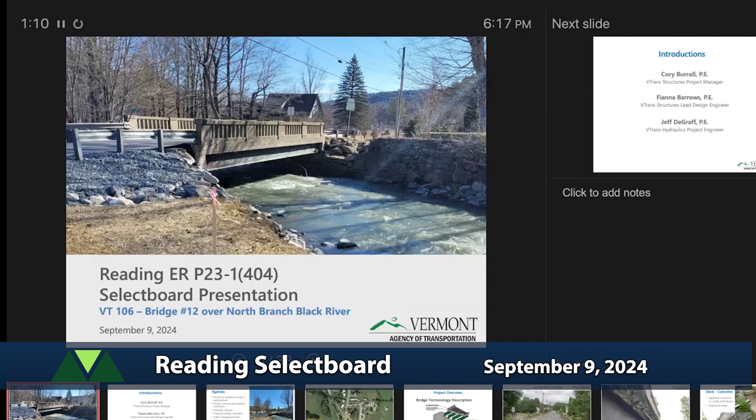Anyways, we will get started. This is the Reading ER P23-1(404) project for Bridge 12 on Route 106. I'm Cory Burrall, the VTrans project manager for the project. I brought with me Fianna Barrows, she's the structures lead design engineer on it, and then I've brought Jeff DeGraff, he is the hydraulics project engineer.

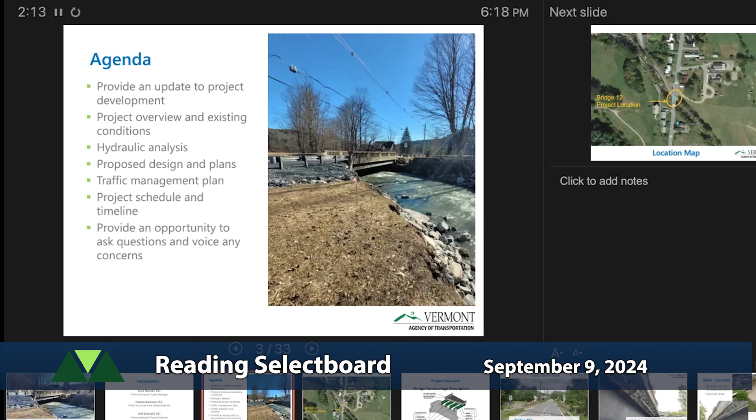So our agenda for the day is we're gonna provide an update to the project development and where we're at. We're gonna discuss the existing conditions and an overview of the design criteria. We're gonna talk about a hydraulic analysis and what we've done to analyze the current structure and how the hydraulics are handled, as well as a future state, and try to mimic the 2023 flood event. We're gonna talk about our proposed design, criteria, and plans. Then we'll talk about a traffic management plan and how we plan to handle traffic during construction of the bridge. And then we'll outline where we're at in the project schedule and timeline, and then provide an opportunity to ask any questions.

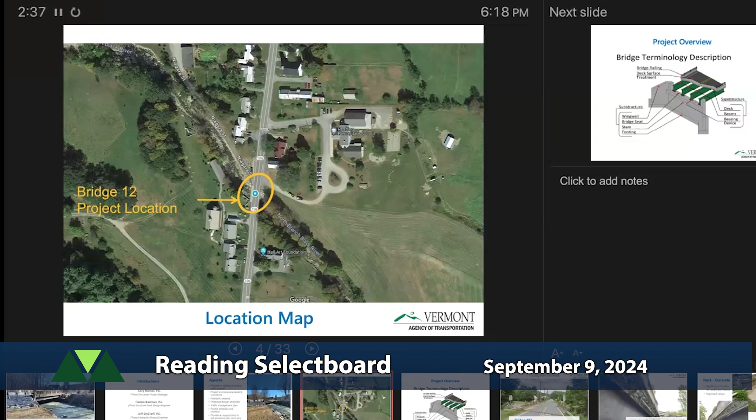So here's a map of Bridge 12 on 106. North of the bridge is the Reading Elementary School. South of the bridge is the Hall Art Foundation. As you can see, the river was a waterfall upstream of the structure, and then fields directly downstream of the structure.

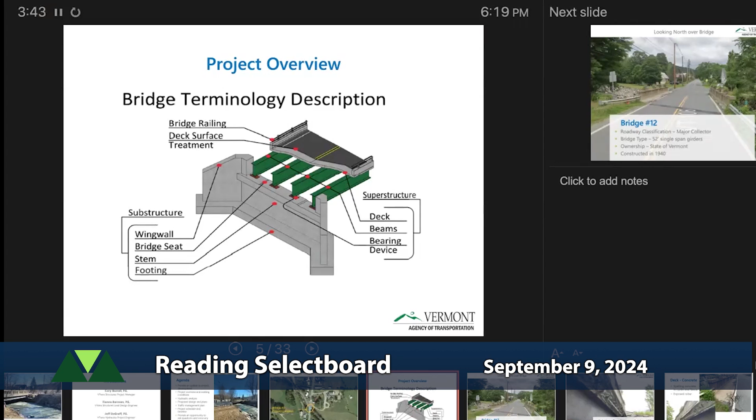And then that's supported by a substructure, which is typically a concrete foundation, either supported by a spread footing or sometimes a deep foundation with piles driven to bedrock. And then you'll see a couple other terms: wing walls connect to the foundation and help support the fill and the roadway. And then stem footing is just components of an abutment or the substructure.

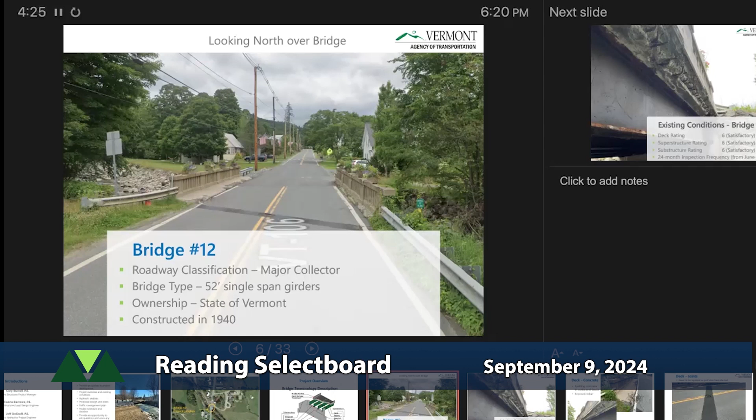It is classified as a major collector, owned by the state of Vermont. It's a 52-foot single span on rolled beams, constructed in 1940, but it's believed the laid up stone wall that the abutment sits on was older than that, so we're not exactly sure of the age.

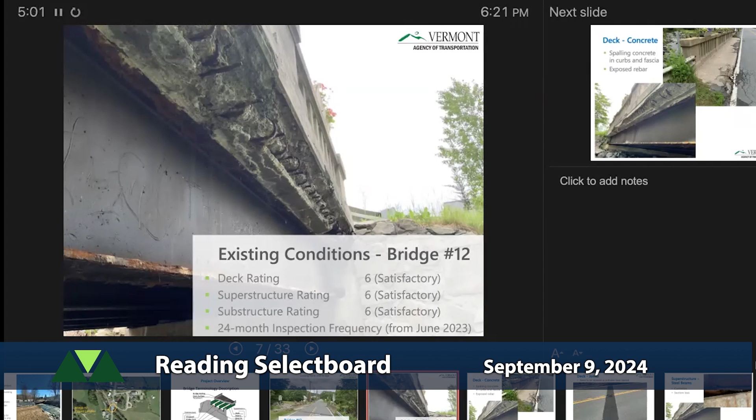Existing conditions: this bridge is on a 2-year inspection frequency. It was last fully inspected in June of 2023, right before the flooding event of July. The deck, superstructure, and substructure all rate out as a 6, which is satisfactory. We understand that post-flood event, some of these ratings may have decreased, but not to a level that would require a full inspection or a decrease in inspection frequency. So they're okay waiting until 2025 for their next full inspection.

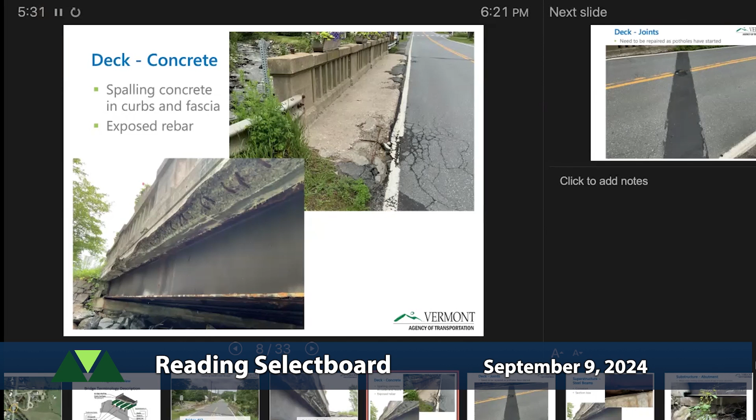Some existing conditions: here's the deck. On the lower left, you can see at the fascia outside edge of the deck, exposed rebar and spalling concrete. On the top surface of the structure, the concrete curb is in pretty rough shape, and one of the railings is definitely tilted.

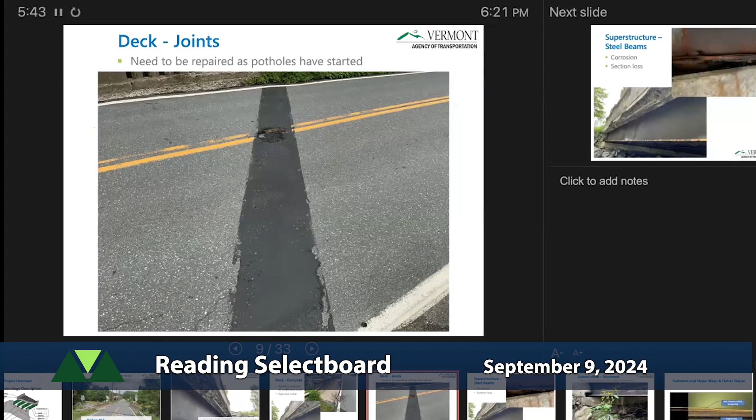Deck joints aren't in the worst condition, but they are deteriorating, so they will need some repair, as well as potholes forming along the deck surface and on the approaches.

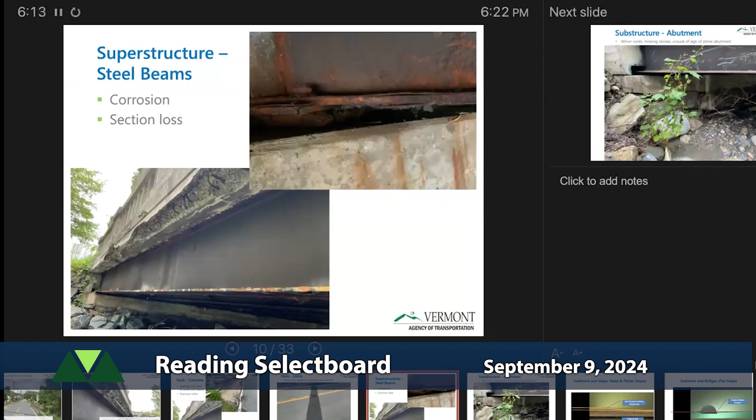The superstructure: the steel beams are corroding. They're not the worst, but they are definitely corroding and have some section loss, particularly the outside beams, most likely due to runoff and salt water. There's also some issues and deterioration of the abutment or the bearings where the beams sit.

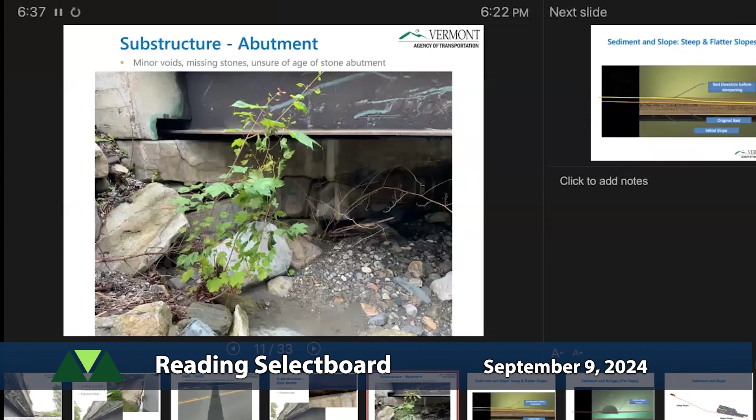Substructure: here you can see the beam coming into the substructure, which is supported on some laid up stone that is in some instances missing. More of the voids are outside the plane of the bridge and in the wing wall areas, but certainly a cause for concern that there's some stone that has been washed away.

I'm going to turn over to Jeff to talk about some hydraulics.

Okay, can everyone hear me? Before I start, I know you all understand what occurred during the July 2023 event. The whole purpose of this presentation is just to show the mechanics that took place and the reasons why the flooding occurred.

Oops, looks like it went. Dun dun dun, let's do that again. We'll just go through it. Don't do it too many times, I think it will then jump way ahead. Okay, I can manually do it. Let's do that, I'll just tell you next slide. Keep going, once it says sediment and slope, right? Go back one, right here. All right, now let's see if I can.

So what I'm showing you in this video is just a flume with sediment in it. What I want to show is when you start to run the sediment flume, you're going to get a whole bunch of deposition upstream, or at the initial source of the material, on a flat bed. But once you start steepening the slope, you're going to start to see what happens with the sediment transport.

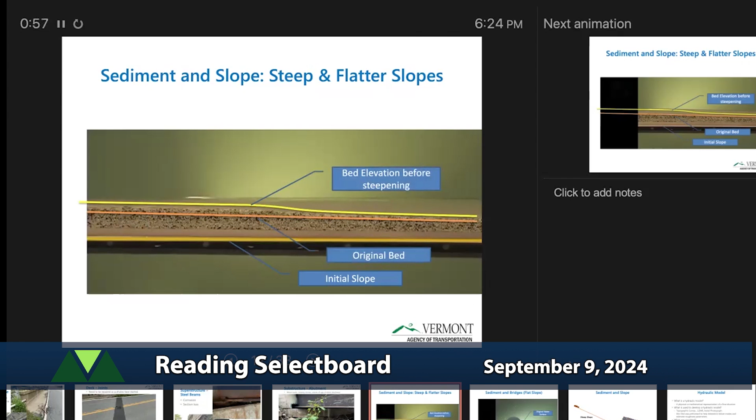Hopefully it works, you just hit the... yep, right here, we're good. So over time, what you're going to see is all the deposited sediment material start to erode away because we're increasing the slope of the bed. Over time, you're going to see the sediment wash out. I just noted with the flat line the initial slope of the original flume.

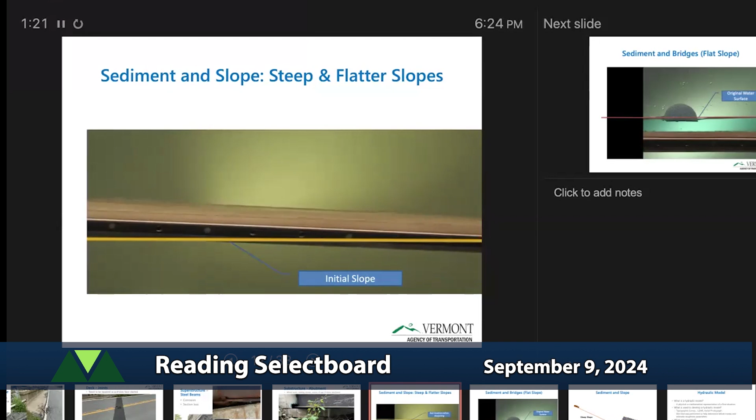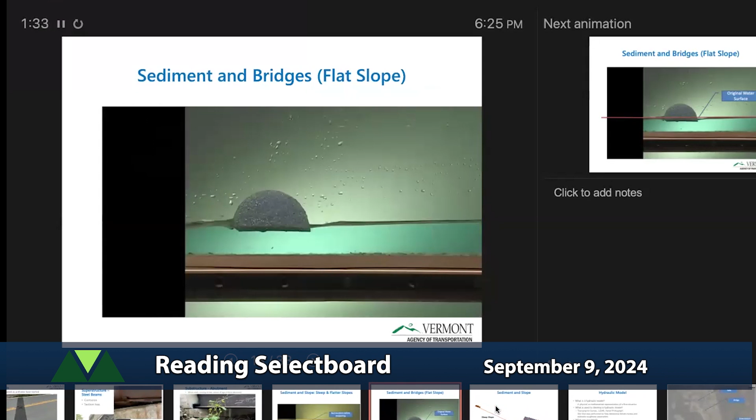Now we're going to go on to the next, can you hit the next slide please? Now what we're going to do is look at how a bridge impacts the sediment transport capacity on a very flat slope. Hopefully this works, can you just hit the arrow again?

So in here, good thing I have everything timed, by the way. In here, I'm just going to show what the initial water surface elevation is. Water surface elevation is the top of the water.

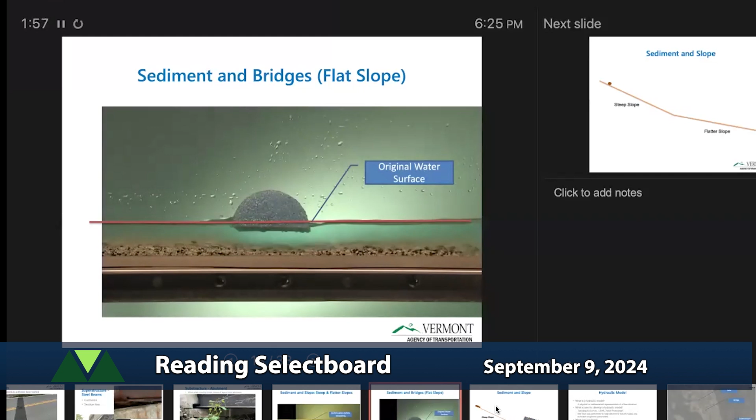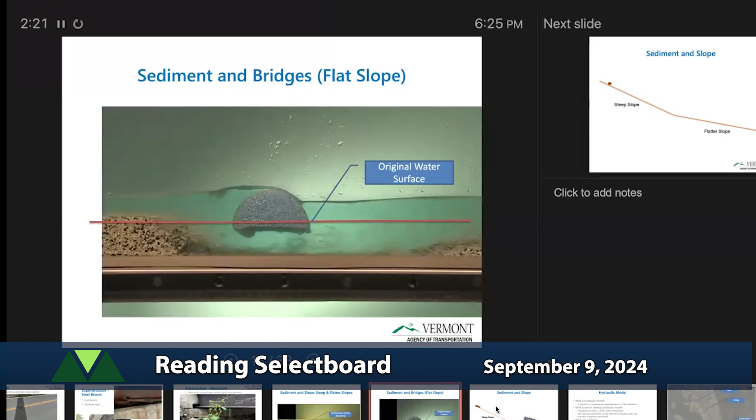The block right there denotes the bridge. Sediment is introduced to the system, and you start seeing, similar to before, deposition upstream near the source. But over time, the sediment starts to raise, and you also get a vertical force, and you get sediment washing through the bridge here. Within this simulation, they allowed the bridge to be overtopped, meaning water is allowed to go over the bridge. But you can see that in a typical situation, if you have a straight channel, sediment will be washed out through the bridge. Next slide, please.

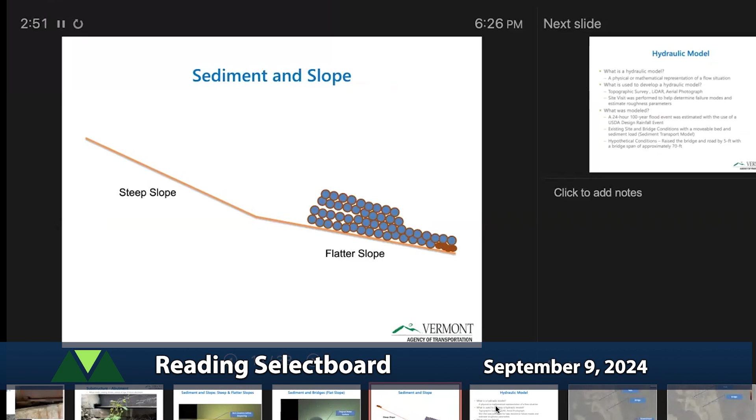So what we did was we developed a hydraulic model. A hydraulic model is just a mathematical representation of a flow situation. The model solves sediment transport and hydraulic equations through an algorithm and a code.

We used LiDAR, survey, and aerial photography, as well as a site visit. Some of you in this room have seen me walk around, and what I was doing was informing the information gaps from our survey, LiDAR, and aerial photography to inform the model further of what could occur.

So what did we model? We modeled a 24-hour, 100-year event using a USDA design storm event, the SCS Type 2 hydrograph, if anyone in this room is privy to that type of information. We modeled the existing conditions with a movable bed. Typical hydraulic models use a fixed bed, meaning the riverbed does not move with time and does not account for sediment. Most FEMA maps you see assume a fixed, unmovable bed with no sediment.

We also performed a hypothetical model which showed no difference in results when we raised the bridge 5 feet in the air, without changing the downstream or upstream slope. And we incorporated a 70-foot wide bridge to increase the hydraulic capacity and realign the abutment so it's more aligned with the flow.

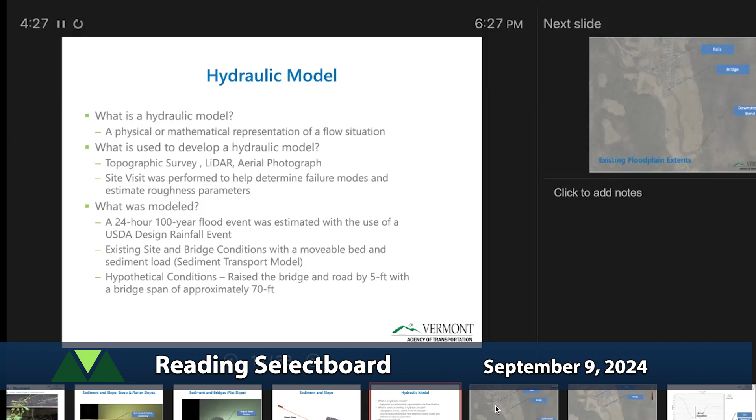Next slide, please. So if you just hit play, we're going to play a movie, hopefully it works. What we're showing here are the results of the existing conditions with a movable bed. Based on what I've talked to residents out in the field, this represents what occurred with where the water went.

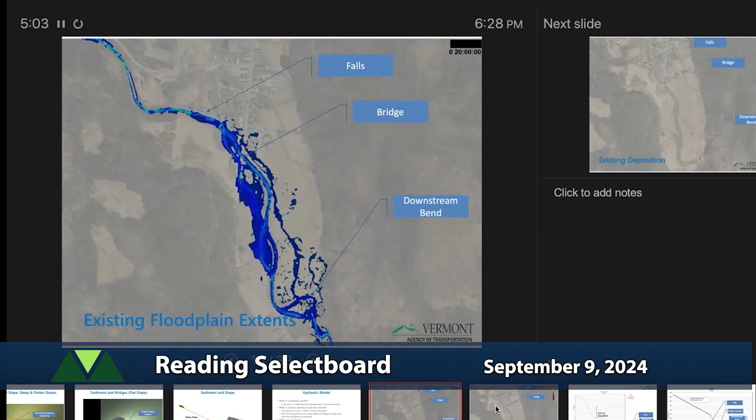If you were to model this without a movable bed, you would not get these results - I want to make that very clear - especially where the falls location is. You got a lot of spread upstream at the falls, which then bypassed the channel and started to flood people to the north as well as the south.

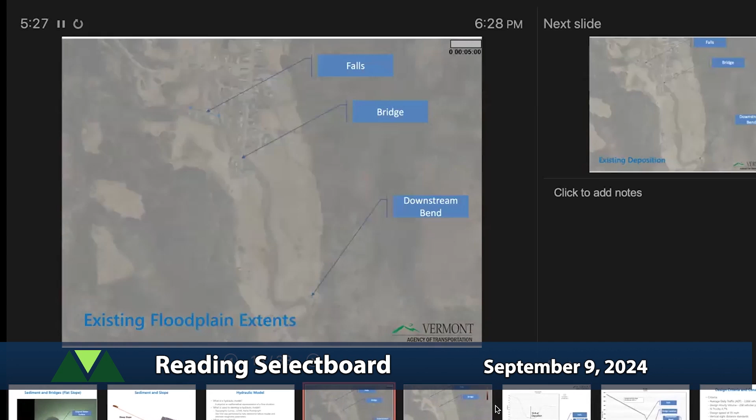Next slide. This is just to show where the deposition occurs, where all the sediment occurs.

Is it going to be exactly the same? No, because many of us may think that all models are right, but actually all models are wrong, but some are useful - it's a famous quote by a statistician. But what this is showing is that we're getting very close to what's happening in the real world. This is a semi-calibrated model, meaning we're matching real world conditions.

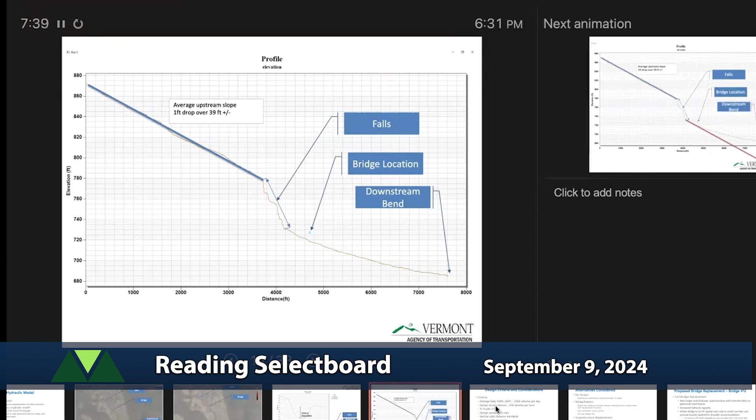We also denote where the falls is and what the upstream slope appears to look like based on LiDAR information. If we were to transpose that slope downstream, what would need to occur in order to mimic similar sediment transport conditions as the upstream slope? We would need to dredge the channel by approximately 40 feet at that downstream bend. We have a slope problem here. I'm not saying the bridge is the cause of it, I'm not saying the bridge is helpful, but what I am saying is there's a slope problem from the upstream to downstream slope, and that's the reason why material is stacking here.

Again, I did say that we modeled a hypothetical condition if we raised the road 5 feet at the bridge. It did not help the situation. What you would do there is cause a dam, and you might actually cause more flooding issues upstream.

Could you say that again, please? If we raised the bridge, raising it an additional 5 feet in the air, and the road's getting raised 5 feet, hypothetically, you could also go down. If we go down, you would have to go 40 feet at the downstream bend to mimic that slope, 40 feet into the bed itself, straight down, because it's a slope issue. You're going from steep to a milder slope.

Okay, sorry to interrupt. It's all good. Did you do any models that show what happens at that bridge opening when it fills with rocks, boulders, and trees as opposed to sediment?

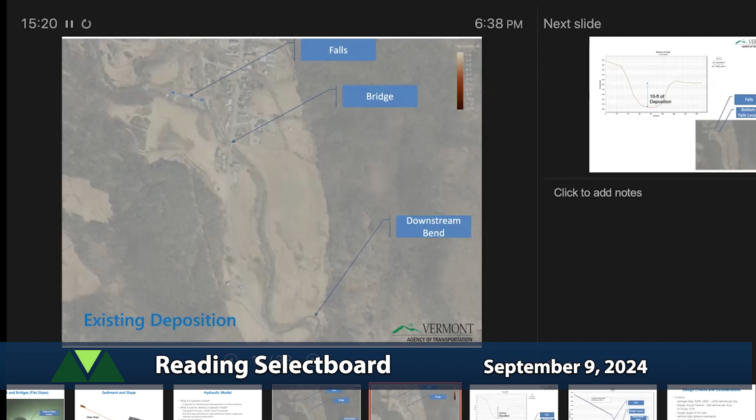So, sorry, Deanna, put you on the spot now. It's okay. Oh, at least it's working for you. She has the touch. You guys are in good hands.

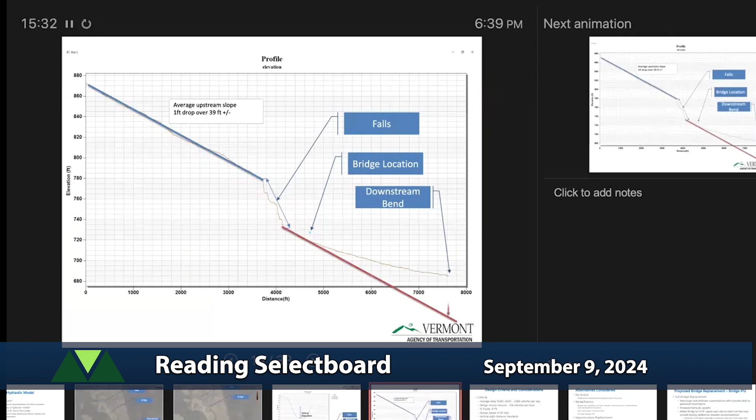All right, so to get back to the project as a whole, on top of hydraulic clearance and hydraulic capacity, other considerations for bridge design would be the traffic volumes, the hourly, the annual, the percent trucks on the roadway, the design speed of the road, the geometric design of the road, so in this case the vertical clearance since it's straight horizontally, and bridge width standards. We also consider right-of-way, utility relocation, the adjacent property owners that will be impacted, historically sensitive properties, and in this case, the nearby elementary school.

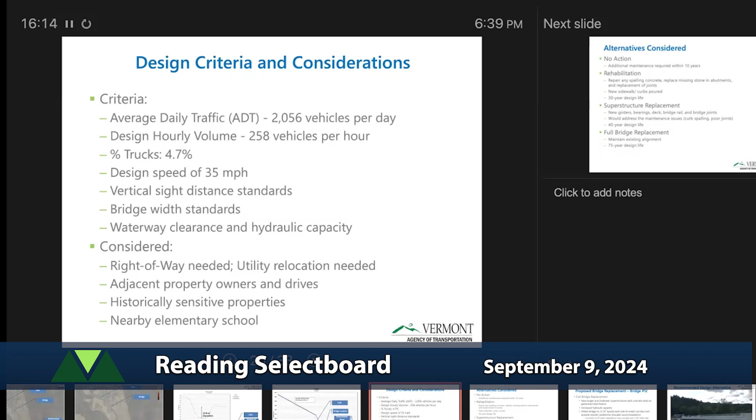Alternatives that we considered: first of all, no action. So we would assume that additional maintenance would probably be needed within the next 10 years based on the existing pictures that you saw earlier. A rehabilitation, which would include repair of any spalling concrete, replacing the missing stone in the abutments, replacement of the bridge joints at the end of the bridges, and a new sidewalk and curbs poured. This would probably give us a bridge with a 30-year design life.

And then an entire superstructure replacement, which would be new girders, new bearings, new concrete deck, new bridge rail and bridge joints at the end. This would address the maintenance issues, the curb spalling, the poor joints. It would not be new abutments. This would be about a 40-year design life. Or a full bridge replacement, which would be the substructure and the superstructure and some approach roadway work, which would give us approximately a 75-year design life.

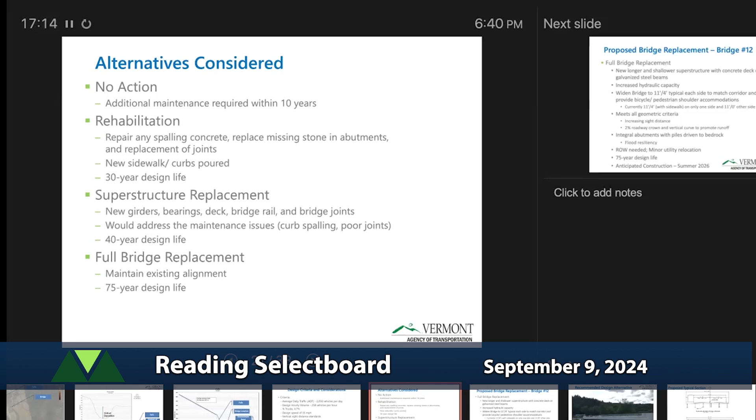We're proposing a full bridge replacement. I'll show you more pictures, but it would be a longer span with a shallower superstructure. So we would increase the hydraulic capacity and the ability for conveyance. It would be a concrete deck on galvanized steel beams. And the bridge would be wider, so it would still have the 11-foot lanes like the current bridge, but we would have one 4-foot shoulder on both sides, instead of the 4-foot wide sidewalk.

And we would meet geometric criteria, so we would increase the sight distance. Right now, there's poor sight distance over the bridge, but it would be increased so that cars could see other cars and pedestrians in the roadway better. And we would make sure there's a 2% roadway crown and vertical curve to promote runoff of water. The superstructure would be sitting on integral abutments, so it's kind of like a pile cap with piles that go down to bedrock, so it would be flood resilient in that case.

We would need some right-of-way, and there would be a minor utility relocation. We'd have a design life of 75 years, like I said before, and our anticipated construction would be in summer of 2026.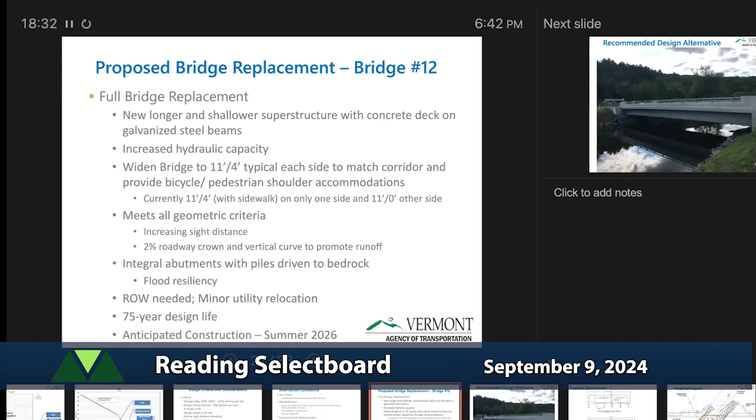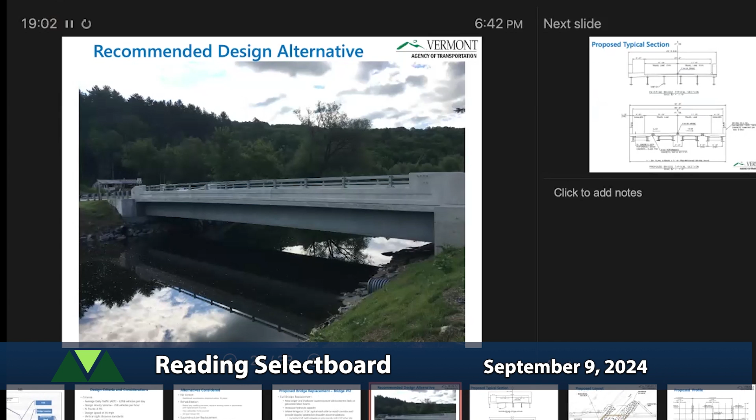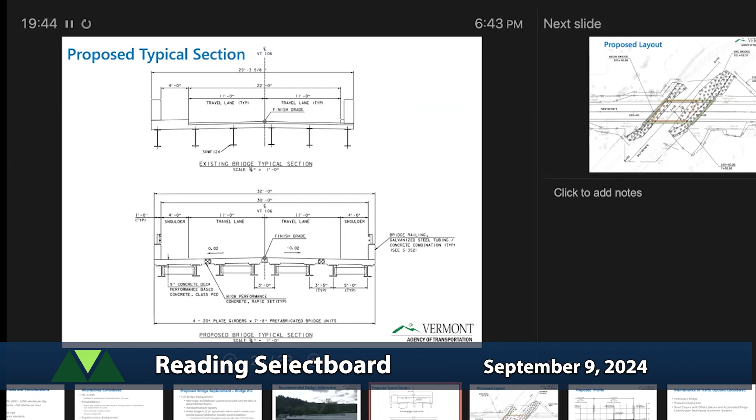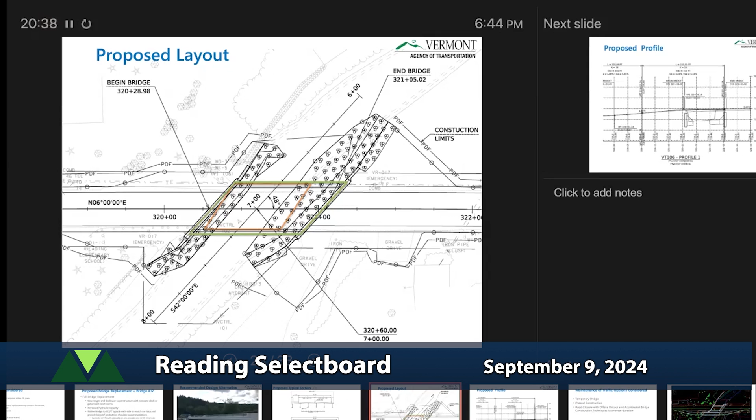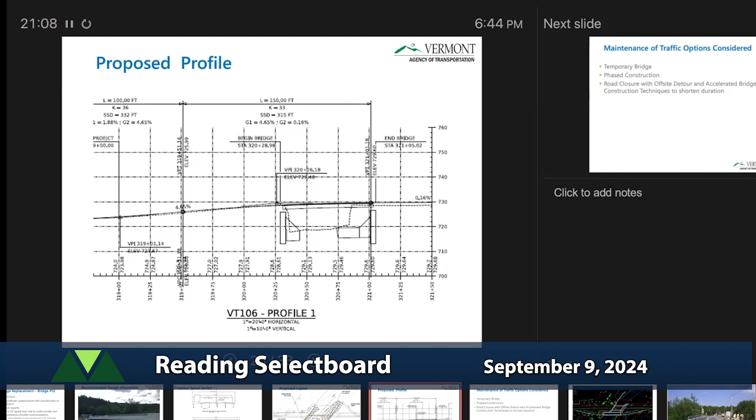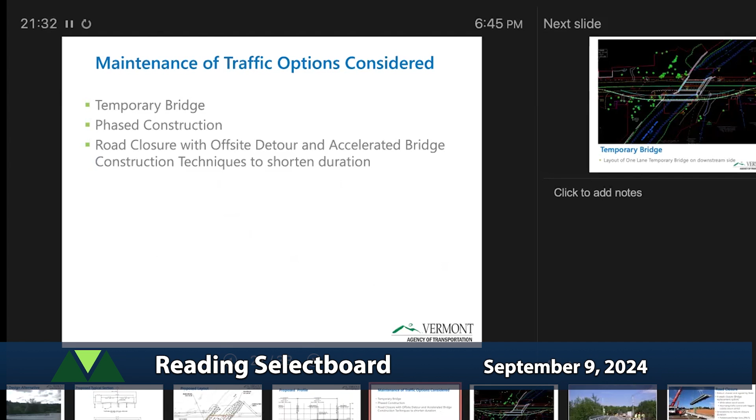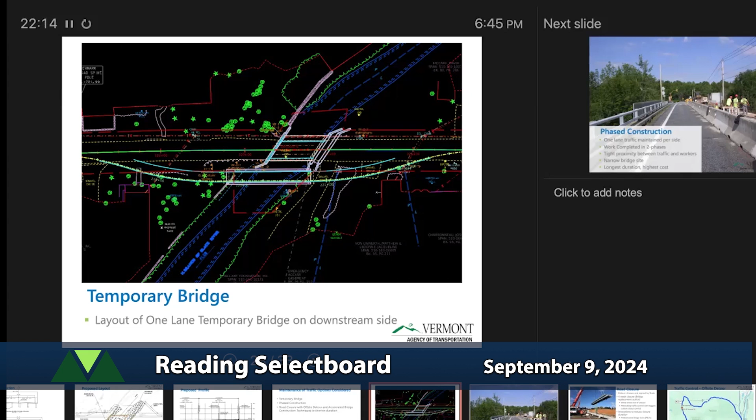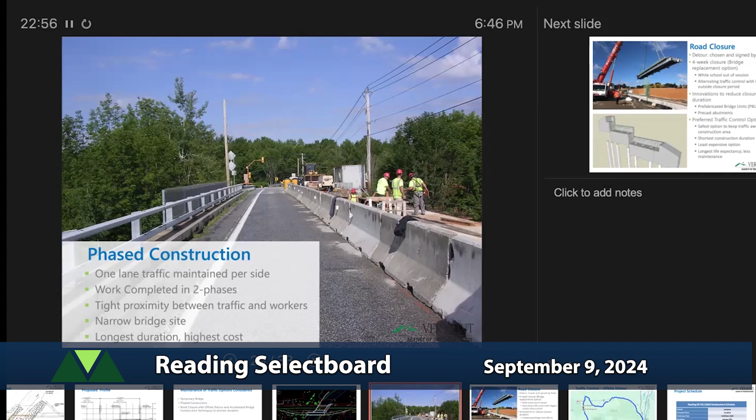And our plan would be to do a road closure with a detour, which would be signed by the state. We anticipate that the closure would be 4 weeks long, and we would plan for it to be while school is out of session. And beyond the 4-week closure, the contractor would be able to have flaggers with 1 lane alternating traffic just during the daytime if they were doing work in advance of the closure for up to 2 weeks, or work after the closure for up to 2 weeks.

So this is our preferred traffic control option. It's the safest option. Traffic will be away from the construction site for those 4 weeks, which also means it's going to be the shortest construction duration, and it's the least expensive option and has the longest life expectancy with the least amount of maintenance long term.

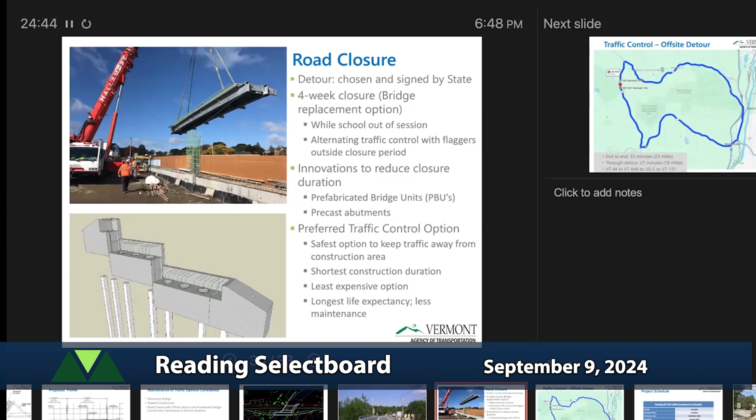And this would be the detour. So end to end is 32 minutes or 23 miles, but through detour would be 27 minutes. This is on state roads, so even if there are local bypasses, we don't have them shown here. So it would be Vermont 44 to Vermont 44A to US 5, and then Vermont 131 and back to Vermont 106. Did you guys take consideration of emergency services during this?

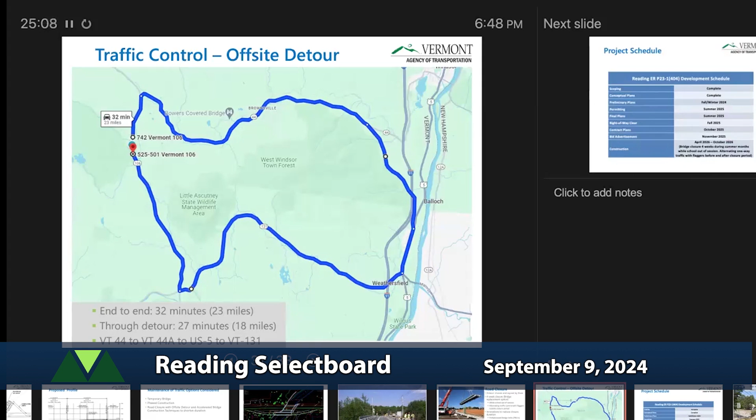We will have to discuss that with the emergency services. Yeah. Yes. That would be me. Yes, okay. Yeah, and a lot of that is put into the contract. The contractor has to be communicating with emergency services beforehand, but also during closure.

All right, so where are we on the project schedule? So we've kind of combined our scoping and conceptual design phase into one. Typically, we get a project and it's a 5-year development process. Obviously, this project got some funds post-flooding event in fall, winter of 2023, so we're pretty much at 1 year into this project. We're at the preliminary design phase. We proposed our bridge replacement here. We're hoping to move forward with that design and develop our preliminary plans and finalize that this fall, winter. And then it goes into permitting.

This bridge is going to need various permits, a flood permit. There may be some archaeologically sensitive and historic areas that need permits. We don't have wetlands delineated at this point because our resource ID process is usually part of the scoping phase, so that's being done right now. So there may be other environmental resources we need to consider.

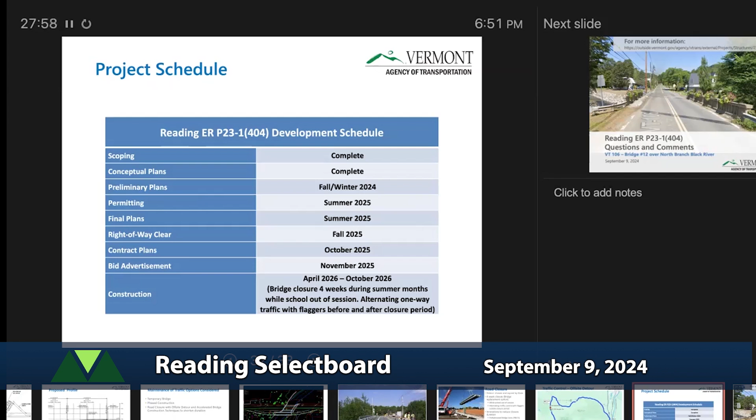I believe that's all we have for our presentation. There's a link, and I'll share this presentation with the select board, and they can post it how they want. There's also a project website that this presentation has a link to at the top, where we'll have this presentation located, as well as a fact sheet and the various plan milestones. Right now it has conceptual plans there, and preliminary plans will be posted once they're completed.